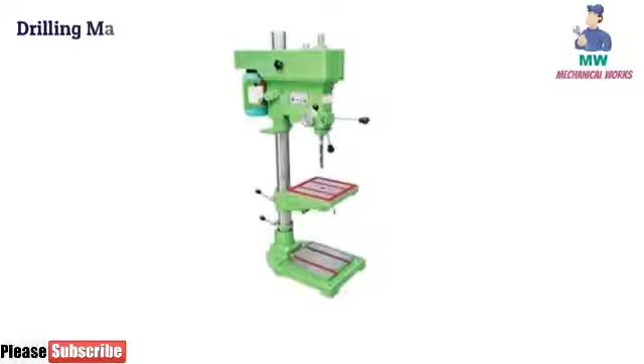The drilling machine is defined as a machine which is used to make a circular hole. A tool called drill bit is used to drill the holes of different size and other related operations. The drilling machine is the second most important machine in a workshop after the lathe machine.

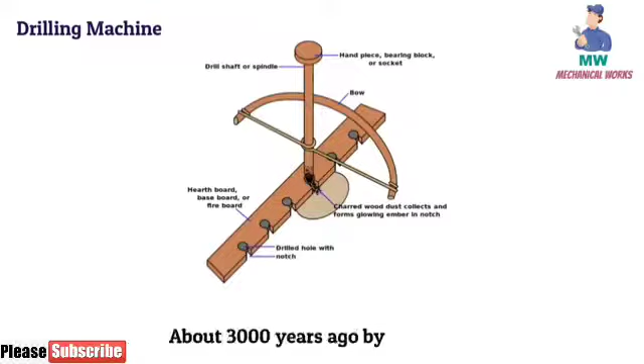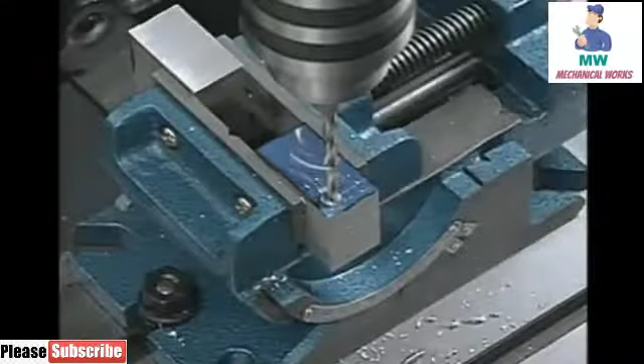Holes were drilled by the Egyptians in 1200 BC, about 3,000 years ago, by bow drills. The bow drill is the mother of the present-day metal-cutting drilling machine. In a drilling machine, holes may be drilled quickly and at low cost.

The hole is generated by the rotating edge of a cutting tool known as the drill. It applies a large force on the work mounted on the table. As the machine uses vertical pressure to originate a hole, it is loosely called a drill press.

Parts of drilling machine. The main parts of drilling machine are base, column, table, table clamp, electric motor, hand wheel, chuck, and drill.

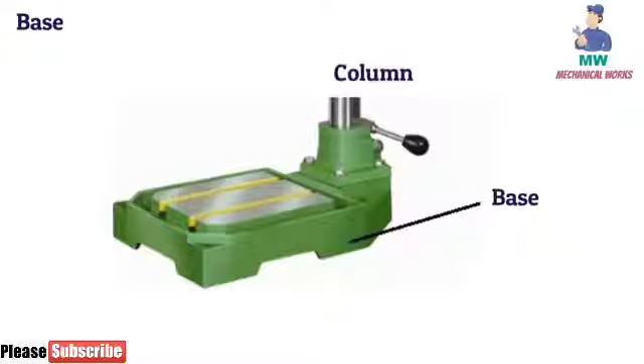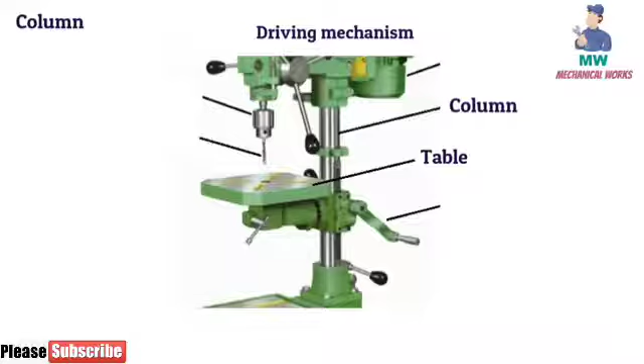The column is the vertical member of the machine which supports the table and the head containing all the driving mechanism. It is a cylindrical casting mounted vertically at one end of the base and supports the radial arm, which slides up and down.

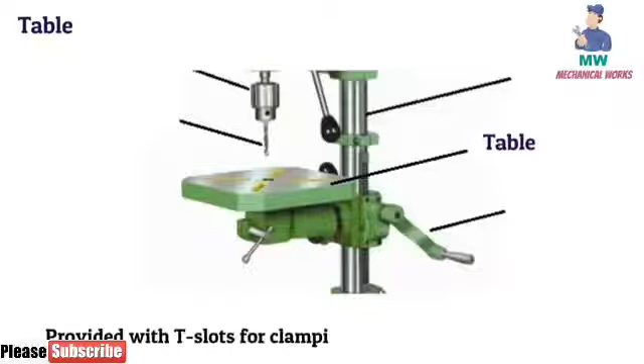The table is mounted on the column and is provided with T-slots for clamping the work directly on its face. The table is round or rectangular in shape. Radial arm is mounted on the column and extends horizontally over the base. It has guideways on which the drill head slides. The radial arm moves around the column.

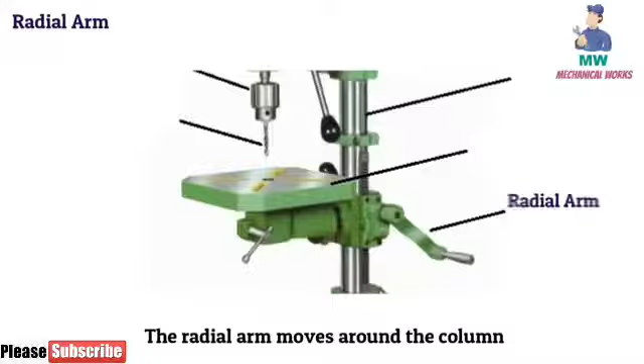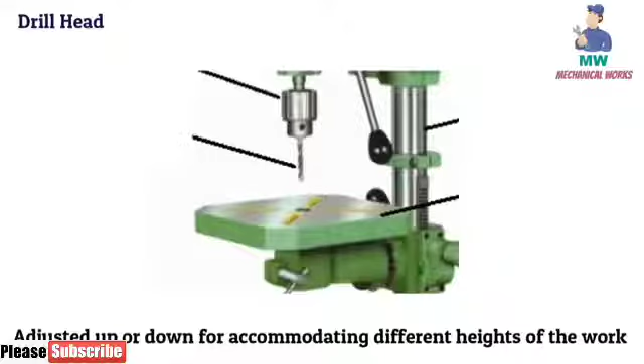Drill head is mounted on the radial arm and drives the drill spindle. In some drilling machines, the drill head may be adjusted up or down for accommodating different heights of the work in addition to the table adjustment. In lighter machines, the driving motor is mounted at the rear end of the head for counterbalancing the weight of the drill spindle.

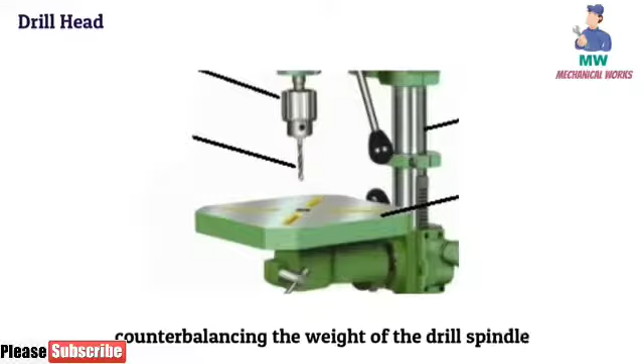Types of drilling machine. There are 8 different types of drilling machine used, which are portable drilling machine, sensitive drilling machine, upright drilling machine, radial drilling machine, gang drilling machine, multiple spindle machine, automatic drilling machine, and deep hole drilling machine.

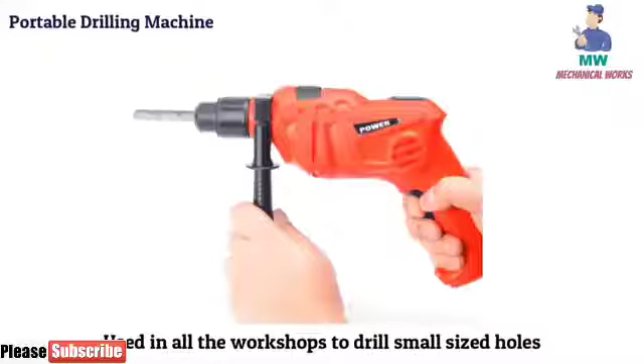Portable drilling machine. These types of drilling machine are commonly used in all the workshops to drill small-sized holes. It is operated by holding in a hand. The workpiece where the hole is to be drilled is held in a vise.

Sensitive drilling machine. This type of drilling machine is used to drill small holes at high speeds in lighter jobs. The machine may be mounted on the floor and the drilling work is started with the drill fed into the workpiece by hand control.

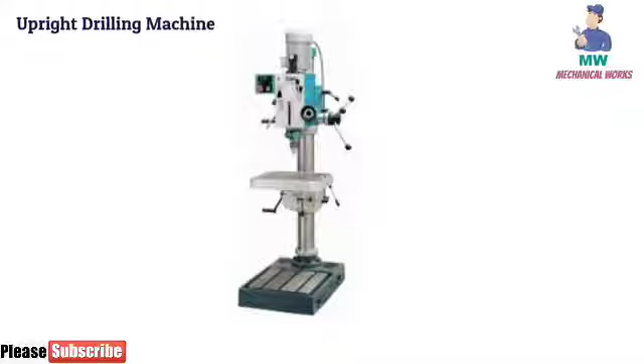Upright drilling machine. Upright is larger in size and stronger than the sensitive drilling machine. It is used for drilling medium and large-sized holes. Based on the type of column used, it is classified as round column and box column upright drilling machines.

Radial drilling machine. The radial drilling machine is shown in the figure. It consists of the base, column, radial arm, drill head, spindle speed, and feed mechanism.

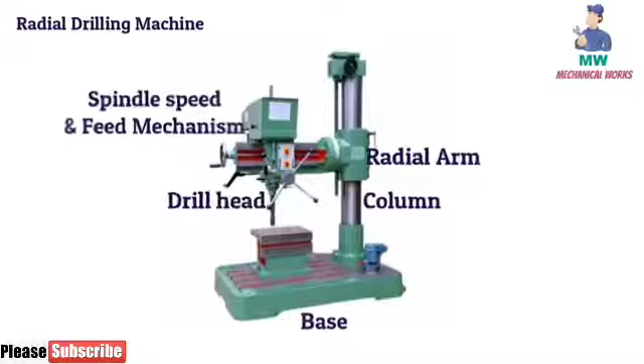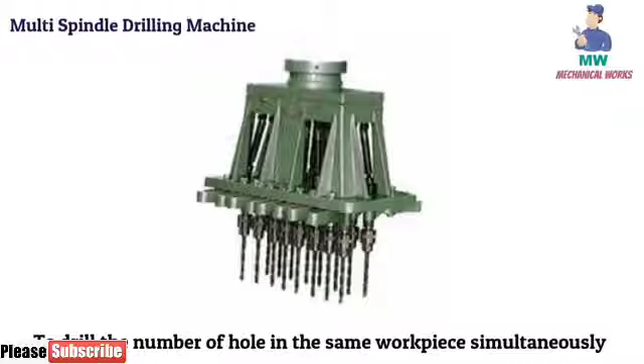Multi-spindle drilling machine. Multi-spindle is used to drill a number of holes in the same workpiece simultaneously, and to reproduce the same work in a number of similar jobs. All the spindles are driven by a single motor and fed continuously. During the feeding, the table with the workpiece is raised or lowered and the drill head position is not varied.

Automatic drilling machine. This type of drilling machine can perform a series of machining operations at successive units and transfer the work from one unit to the other automatically. Once the work is loaded at the first machine, the work will move from one machine to the other where different operations can be performed, and the finished work comes out from the last unit without any manual handling.

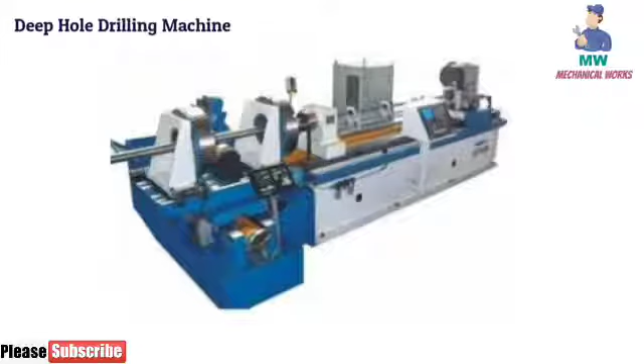Deep hole drilling machine. This may be either a horizontal or vertical type of machine. In this drilling machine, the part to be drilled is rotated and the drill bit that makes the hole is kept stationary. Deep hole drilling is done in components like rifle barrels, crankshafts, and long shafts, etc.

Drilling machine tools. The drill is a fluted cutting tool used to originate or enlarge a hole in a solid material. Drills are manufactured in a wide variety of types and sizes.

The different types of tools used in drilling machines are flat or spade drill tool, straight fluted drill tool, and two-lip twist drill tool. In two-lip drills there are four types available: parallel shank short series or jobber's twist drill, parallel shank stub series twist drill, parallel shank long series twist drill, taper shank twist drill, taper shank core drill, 3 or 4 fluted oil tube drill, and center drill.

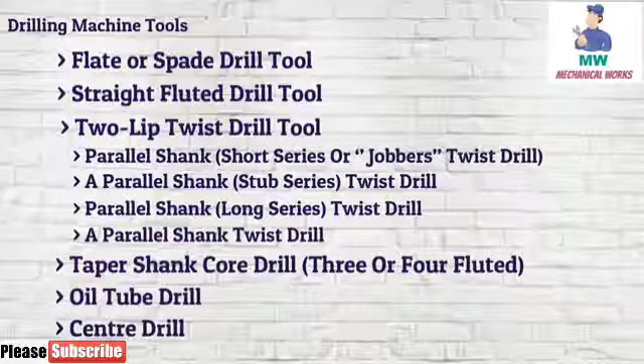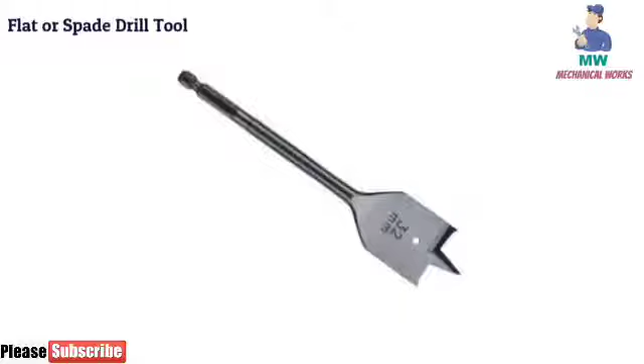Flat or spade drill tool. A flat drill is sometimes used when the same size twist drill is not available. It is usually made from a piece of round tool steel which is forged to shape and ground to size. The cutting angle varies from 90 to 120 degrees, and the relief or clearance at the cutting edge is 3 to 8 degrees. The disadvantage of this type of drill is that each time it is ground, the diameter is reduced.

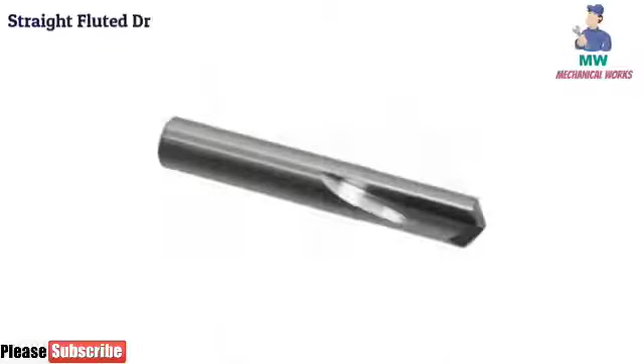Straight fluted drill. A straight fluted drill has grooves or flutes running parallel to the drill axis. It may be considered as a cutting tool having zero rake. This type of drill is inconvenient in standard practice as the chips do not come out from the hole automatically. It is mainly used in drilling brass, copper, or other softer materials.

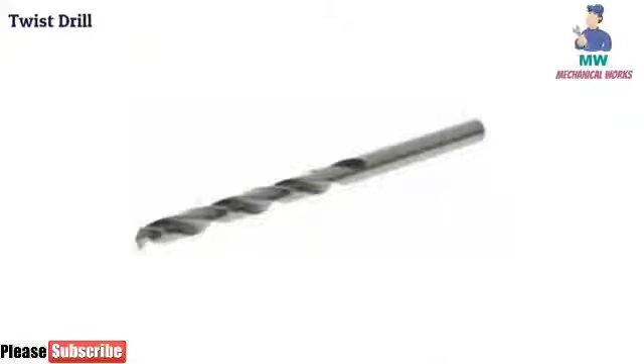Twist drill. It is the most commonly used type of drill and was originally manufactured by twisting a flat piece of tool steel. Present-day twist drills are made by machining two spiral flutes or grooves that run lengthwise around the body of the drill.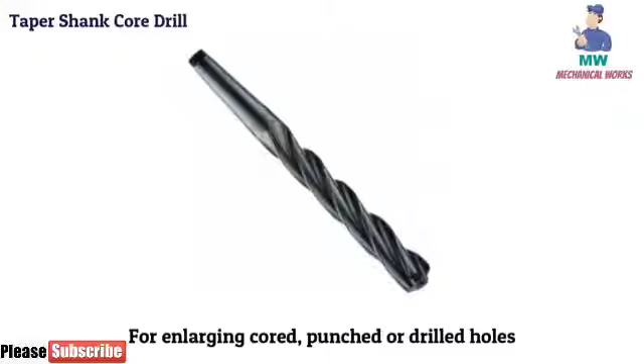Taper shank core drill. These drills are intended for enlarging cored, punched, or drilled holes. They cannot originate a hole in solid material because the cutting edges do not extend to the center of the drill. The metal is removed by a chamfered edge at the end of each flute. Core drills produce better finished holes than those cut by ordinary two-fluted drills.

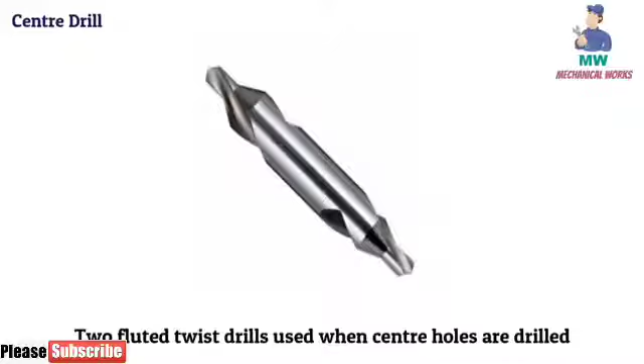Center drill. Center drills are straight shank, two-fluted twist drills used when center holes are drilled on the ends of a shaft. They are made in finer sizes.

Drilling machine operations. The different operations performed on the drilling machine are drilling, reaming, boring, counterboring, countersinking, spot facing, tapping, lapping, grinding, and trepanning.

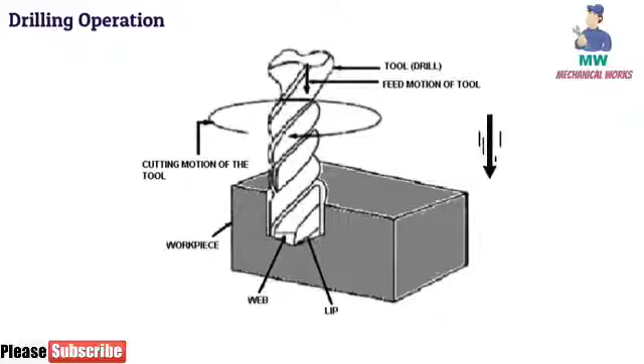Drilling operation. Drilling is the operation of producing a cylindrical hole by removing metal using a rotating cutting tool called the drill. It is one of the simplest methods of producing a hole. The center of the hole is located on the workpiece by drawing two lines, and the drill point is pressed at this center point to produce the required hole. The internal surface of the hole generated by drilling becomes rough, and the hole is always slightly oversized due to the vibration of the spindle and the drill.

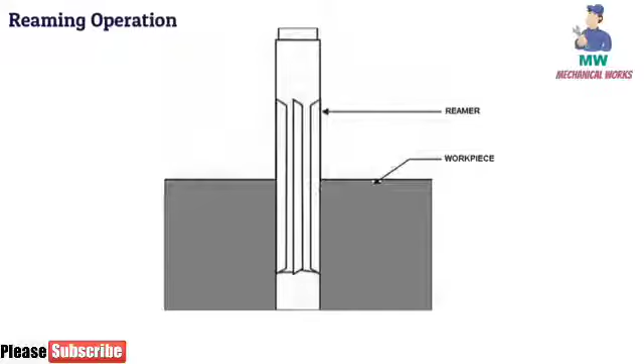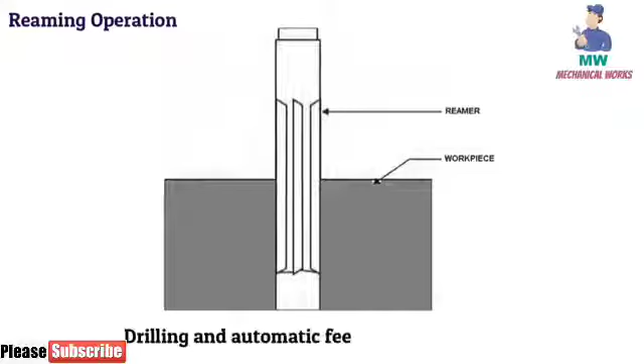Reaming operation. Reaming is an accurate way of sizing and finishing a hole which has been previously drilled. In order to finish a hole and bring it to accurate size, the hole is drilled slightly undersize. The speed of the spindle is made half that of drilling, and automatic feed may be employed. The tool used for reaming is known as a reamer, which has multiple cutting edges.

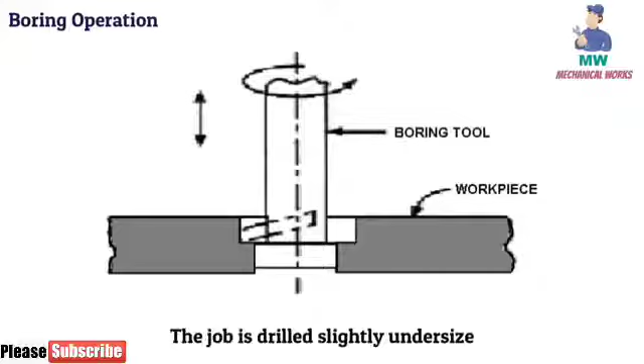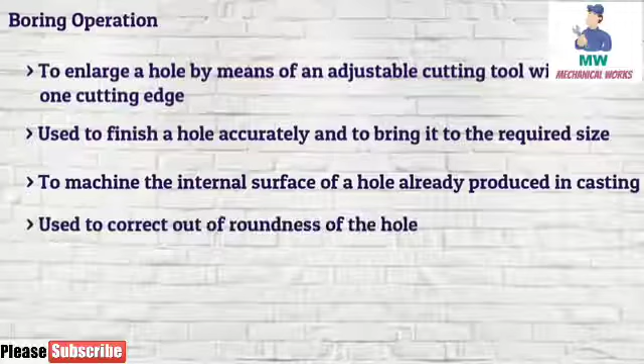Boring operation. In boring, the cutter is held in a boring bar which has a tapered shank to fit into the spindle socket. For perfect finishing, the job is drilled slightly undersize. Boring enlarges a hole by means of an adjustable cutting tool with only one cutting edge, used to finish a hole accurately and bring it to the required size, to machine the internal surface of a hole already produced in casting, to correct out-of-roundness of the hole, and to correct the location of the hole as the boring tool follows an independent path with respect to the hole.

Counterboring operation. Counterboring is the operation of enlarging the end of a hole cylindrically. The enlarged hole forms a square shoulder with the original hole. This is necessary in some cases to accommodate the heads of bolts, studs and pins. The tool used for counterboring is called a counterbore. Counterbores are made with a straight or tapered shank to fit the drill spindle, and the cutting edges may have straight or spiral teeth.

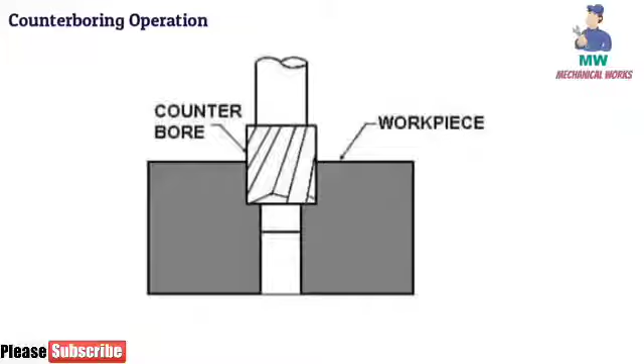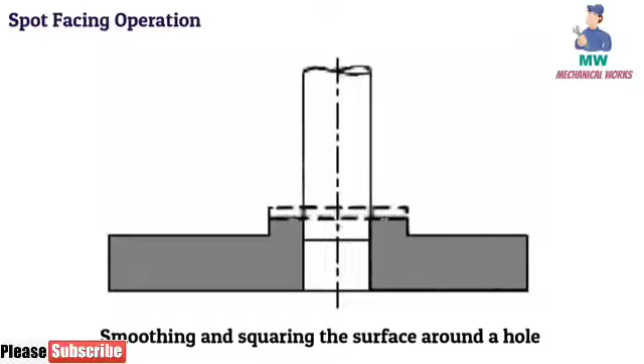Spot facing operation. Spot facing is the operation of smoothing and squaring the surface around a hole for the seat of a nut or the head of a screw. A counterbore or a special spot facing tool may be employed for this purpose.

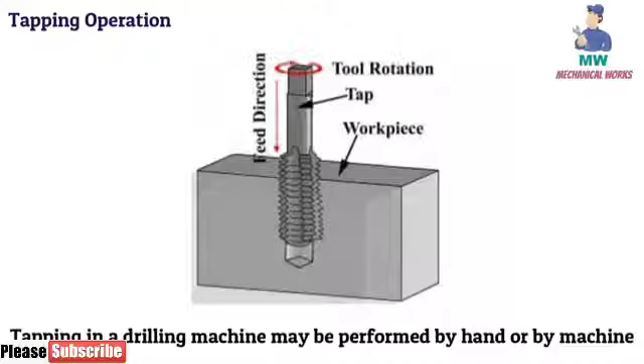Tapping operation. It is the operation of cutting internal threads by means of a cutting tool called a tap. Tapping on a drilling machine may be performed by hand or by machine. A tap may be considered as a bolt with accurate threads cut on it, and the threads act as cutting edges which are hardened and ground.

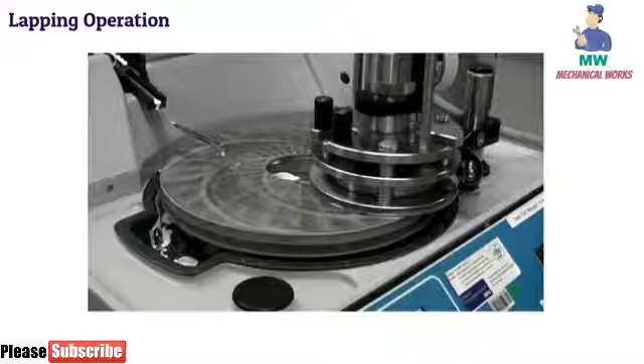Lapping operation. Lapping is the operation of sizing and finishing a small diameter hole that is already hardened, by removing a very small amount of material using a lap. There are many kinds of lapping tools, and copper head laps are commonly used. The lap fits in the hole and is moved up and down while it revolves.

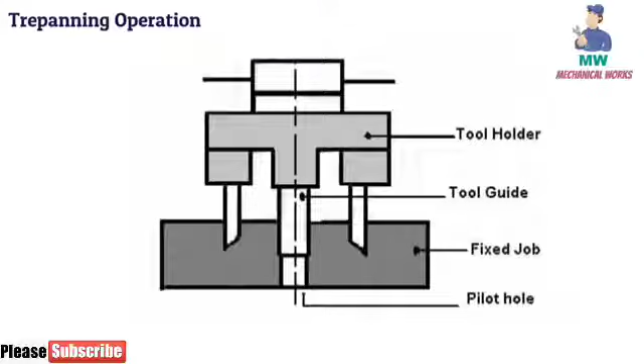Trepanning operation. Trepanning is the operation of producing a hole by removing metal along the circumference using a hollow cutting tool. This operation is performed for producing large holes. Fewer chips are removed and much of the material is saved while the hole is produced.